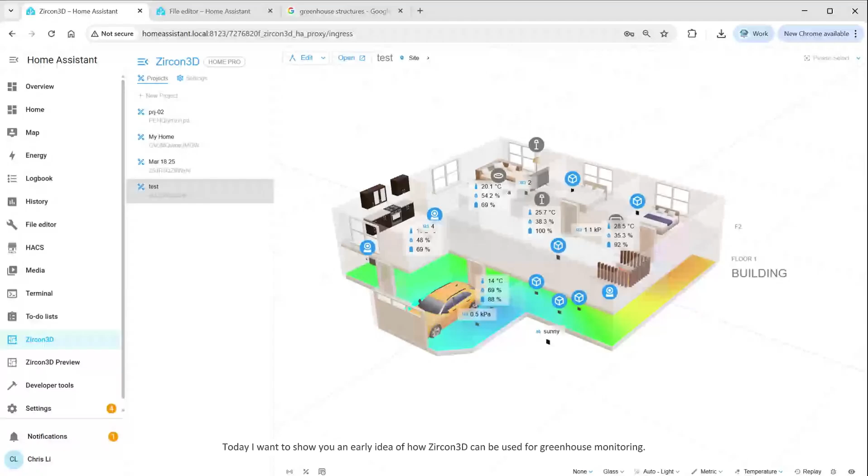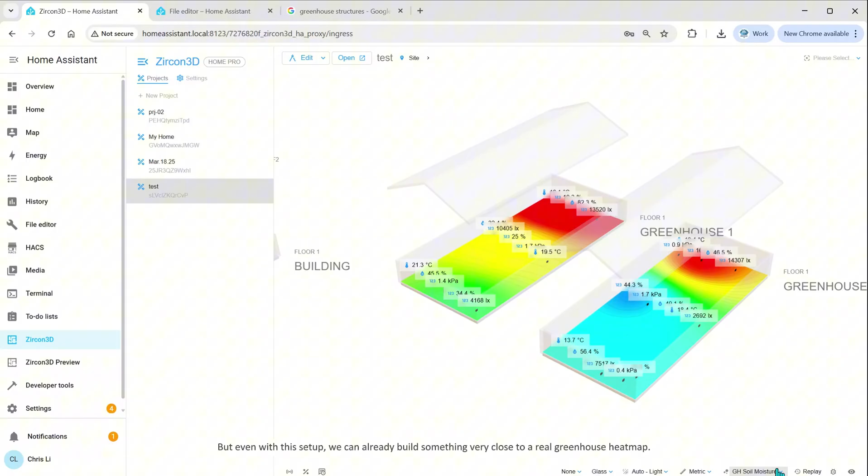Today I want to show you an early idea of how Zircon3D can be used for greenhouse monitoring. What you're seeing in this video is actually the current Zircon3D Home version, running on Home Assistant without any special greenhouse edition yet. But even with this setup, we can already build something very close to a real greenhouse heat map. We are also actively developing a dedicated Zircon3D Greenhouse version.

It will include more realistic, greenhouse-specific models, such as greenhouse structures and layouts that better reflect real growing environments. And we'll share an early version for demo in the coming months when it's ready.

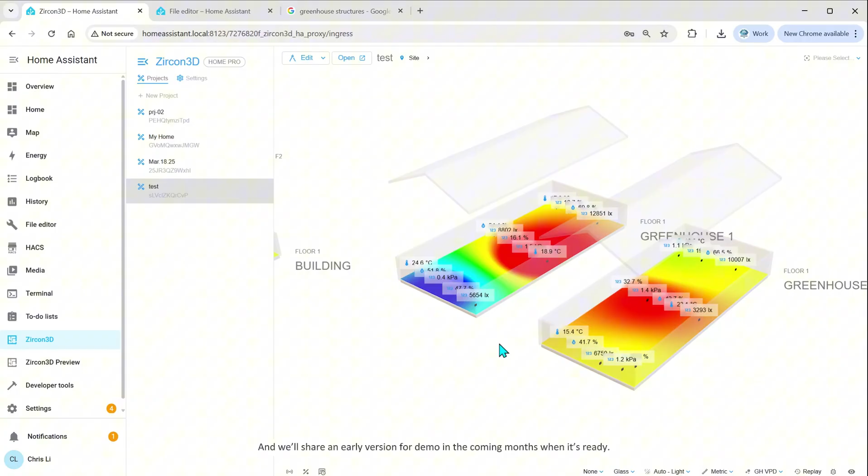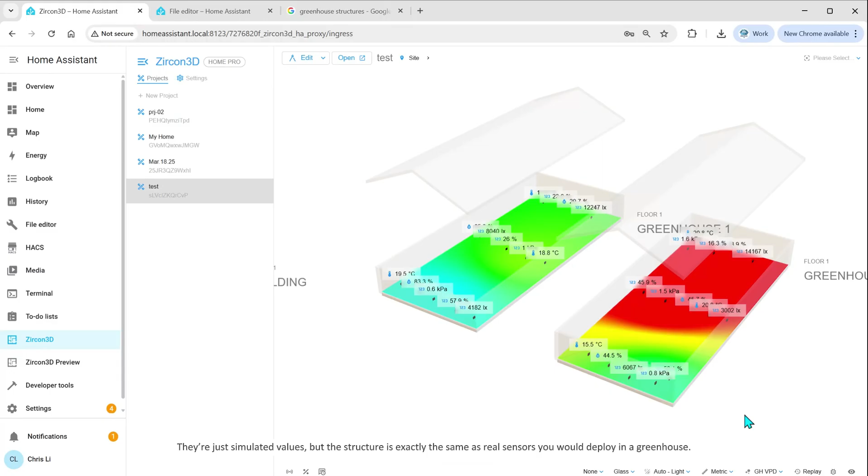In this demo, I'm using Home Assistant template sensors to represent greenhouse data, things like temperature or humidity across different areas. They're just simulated values, but the structure is exactly the same as real sensors you would deploy in a greenhouse. Here I've modeled two simple greenhouses using the same home design tools, and it already works naturally for greenhouse layouts.

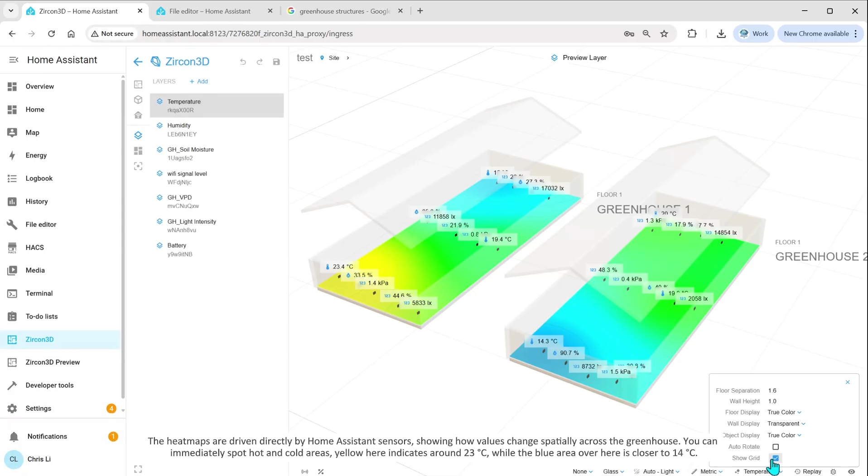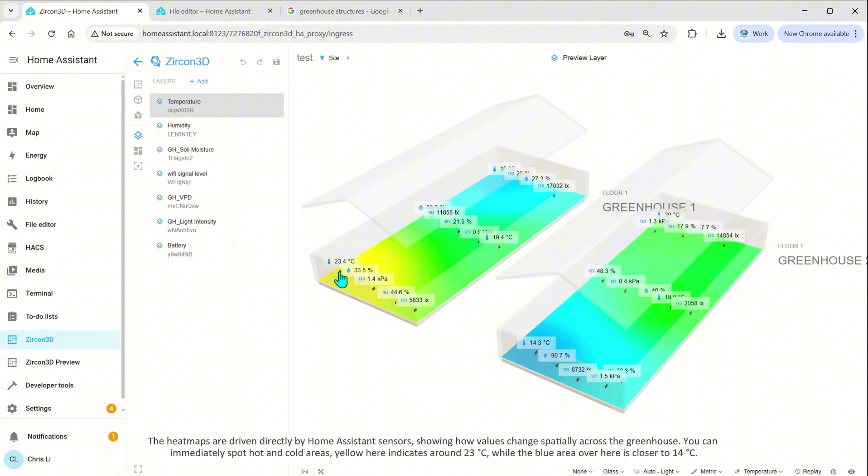The heat maps are driven directly by Home Assistant sensors, showing how values change spatially across the greenhouse. You can immediately spot hot and cold areas. Yellow here indicates around 23 degrees Celsius, while the blue area over here is closer to 14 degrees Celsius.

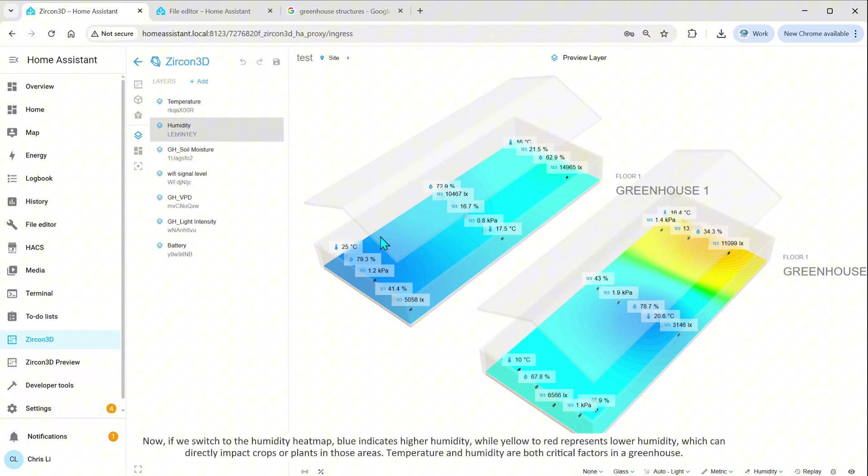Now, if we switch to the humidity heat map, blue indicates higher humidity, while yellow to red represents lower humidity, which can directly impact crops or plants in those areas. Temperature and humidity are both critical factors in a greenhouse. When temperature and humidity are combined, they directly describe plant transpiration conditions.

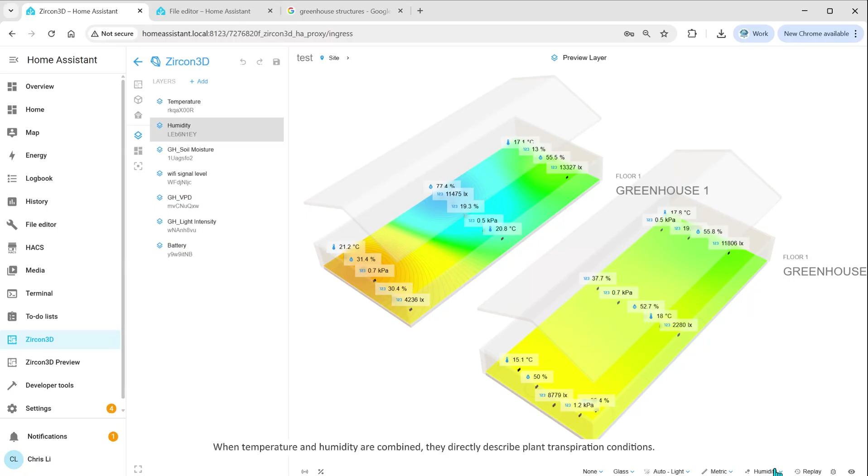In this VPD heatmap, it visualizes how plant transpiration pressure varies spatially across the greenhouse. Blue areas indicate low VPD, where the transpiration is limited, while yellow to red areas indicate high VPD, where the air is too dry and plants may experience stress.

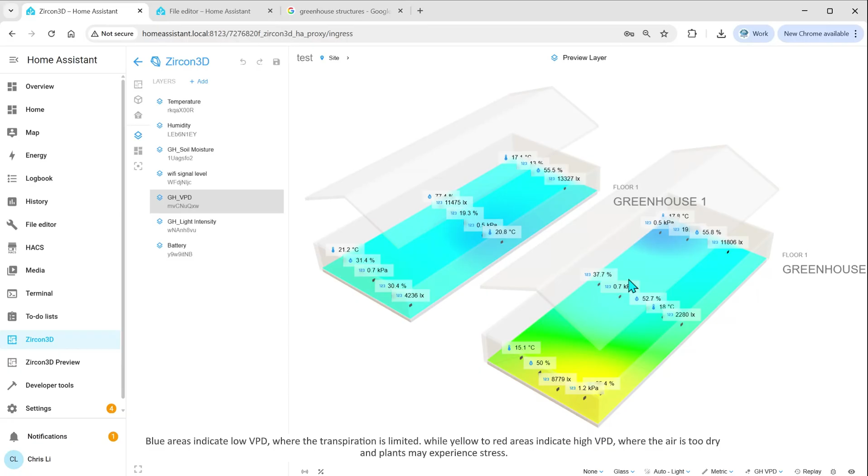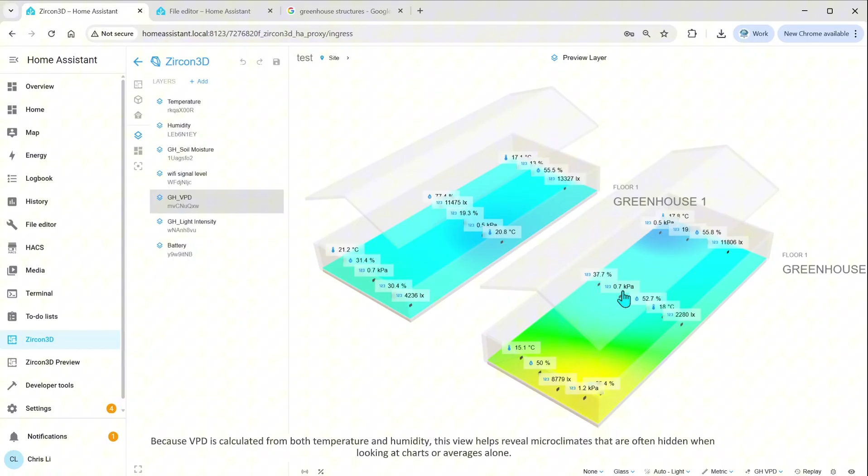Because VPD is calculated from both temperature and humidity, this view helps reveal microclimates that are often hidden when looking at charts or averages alone. This heat map is a diagnostic view that helps reveal how climate conditions vary across the space.

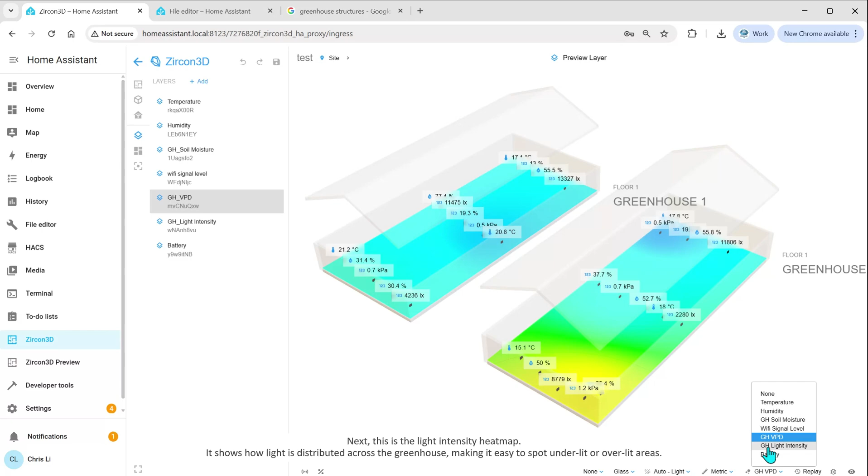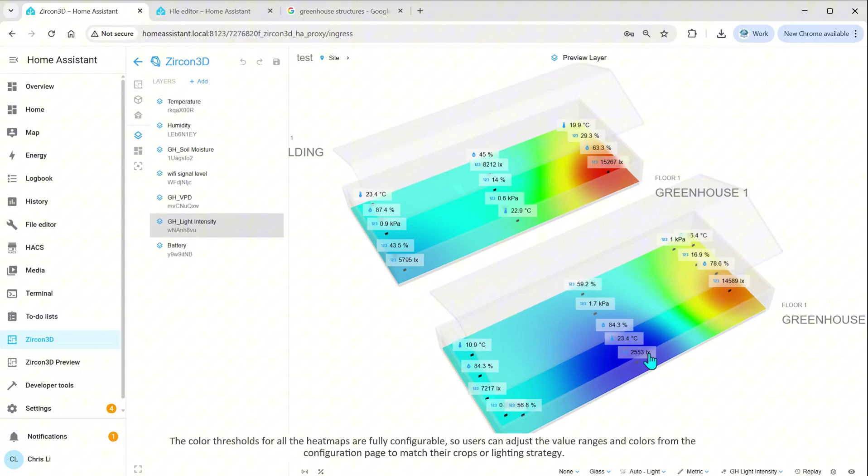Next, this is the light intensity heat map. It shows how light is distributed across the greenhouse, making it easy to spot underlit or overlit areas. The color thresholds for all the heat maps are fully configurable, so users can adjust the value ranges and colors from the configuration page to match their crops or lighting strategy.

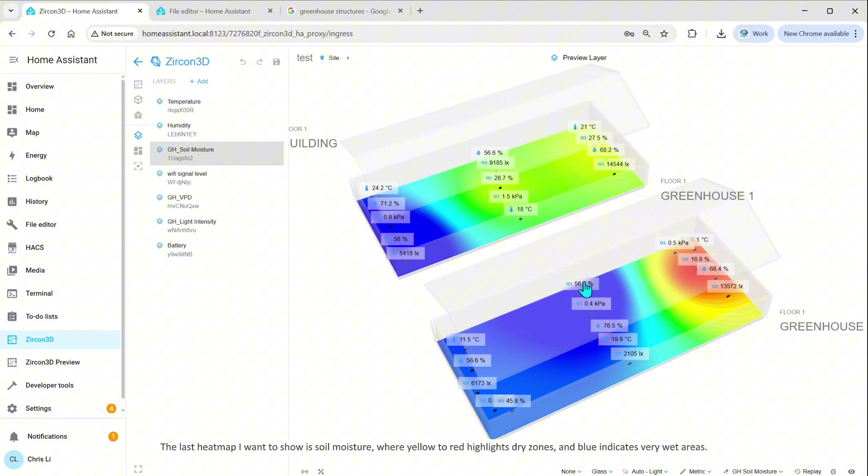The last heat map I want to show is soil moisture, where yellow to red highlights dry zones and blue indicates very wet areas. Soil moisture is especially important in greenhouses because uneven irrigation or drainage can directly affect root health and plant growth.

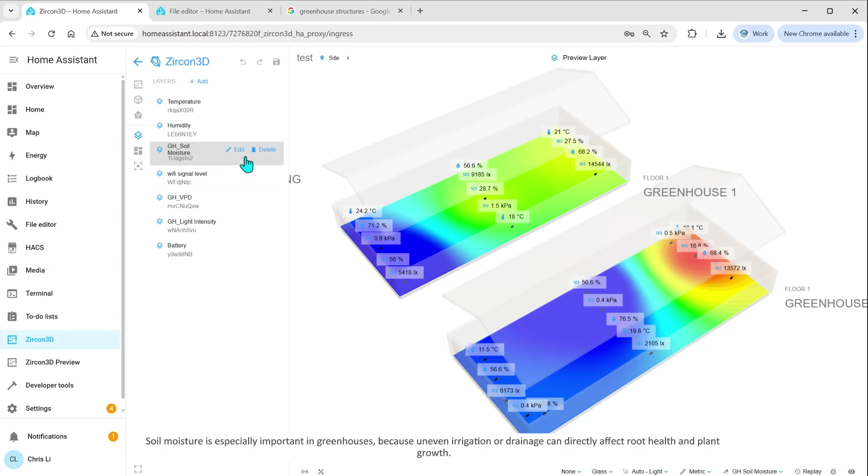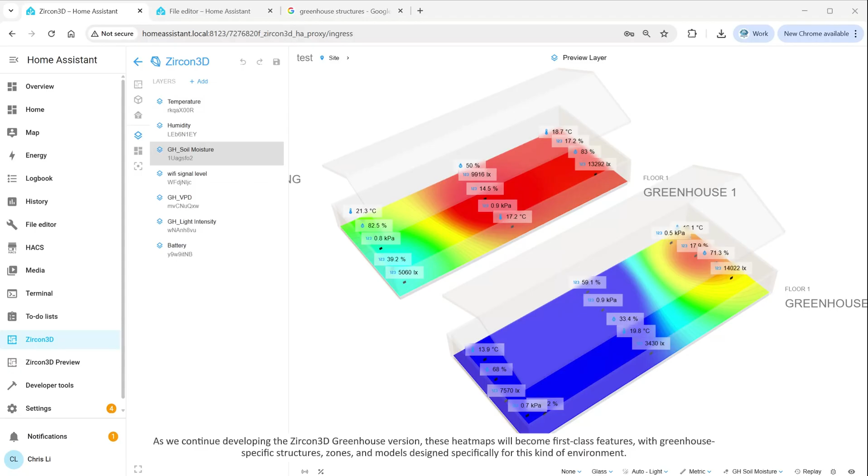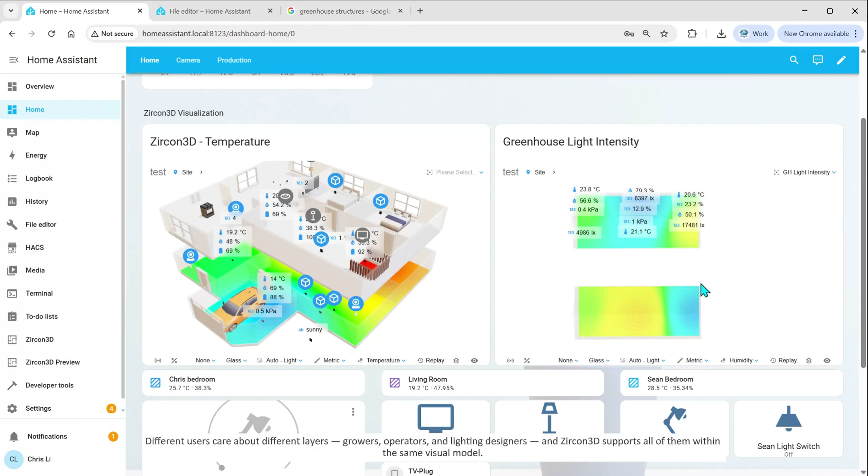As we continue developing the Zircon3D Greenhouse version, these heat maps will become first-class features with greenhouse-specific structures, zones, and models designed specifically for this kind of environment. Different users care about different layers, growers, operators, and lighting designers, and Zircon3D supports all of them within the same visual model. Thanks for watching, and I'll share more updates soon.